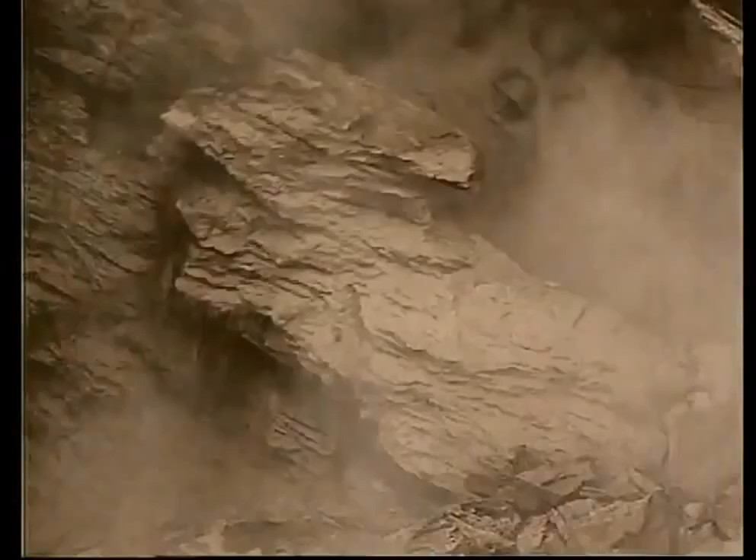To do this, miners will have to punch their way through some of the hardest rock on Earth. It will take the largest drilling machines on this planet, each more than 3 stories high and longer than 4 football fields, drilling 24 hours a day for 6 years to get the job done. The project is incredibly dangerous and outrageously expensive. The price tag, $7 billion.

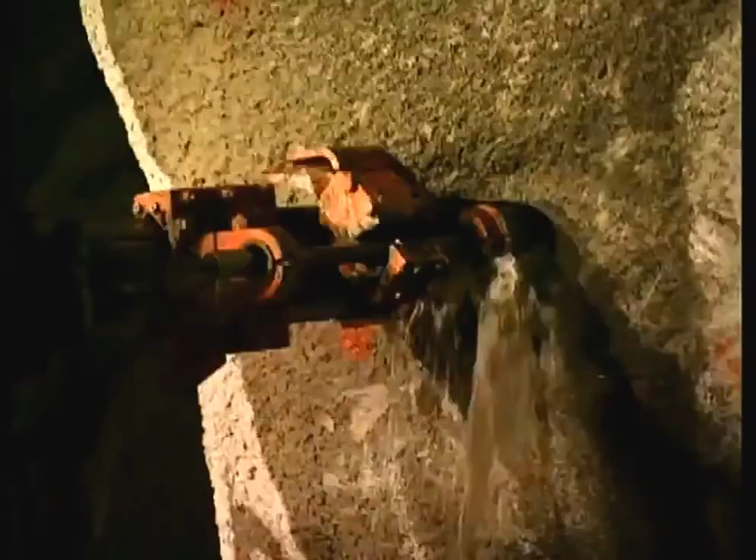Can it be done? Or will unforeseen problems bankrupt the project before it's finished? Will engineers be able to avoid the horrible fate of so many other tunnels? Fire, disaster, and death.

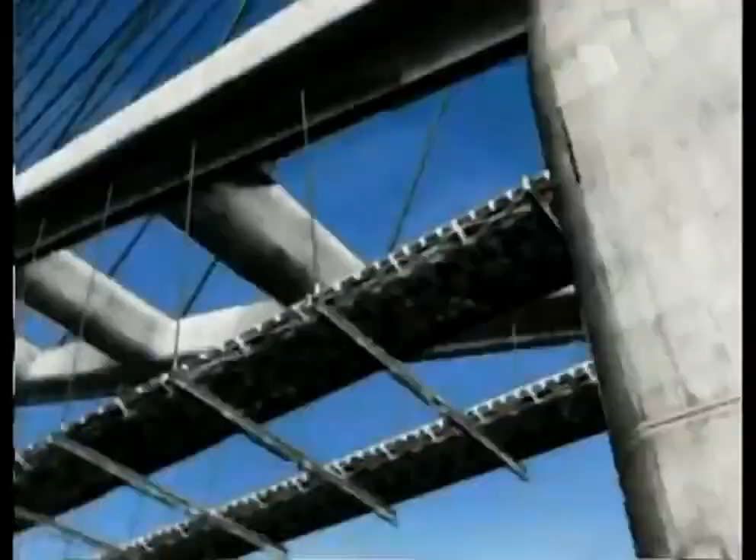To the outside world, Switzerland is a picture postcard. But the reality is not so pretty. Because of Switzerland's central location, each year 14 million trucks and cars coming from every corner of Europe pass through Switzerland on their way elsewhere. The sheer volume is fast turning this country into the biggest traffic jam in the world.

An obvious solution: put more freight and passengers onto trains to reduce the number of trucks and cars on the road. But it isn't that simple. The antiquated railway system is already jammed to capacity. In 1998, Swiss voters decided that something had to be done. So they voted to authorize a whopping $21 billion for a mammoth project. A high-speed rail network to be built under the Alps, connecting Switzerland to the major cities of Europe.

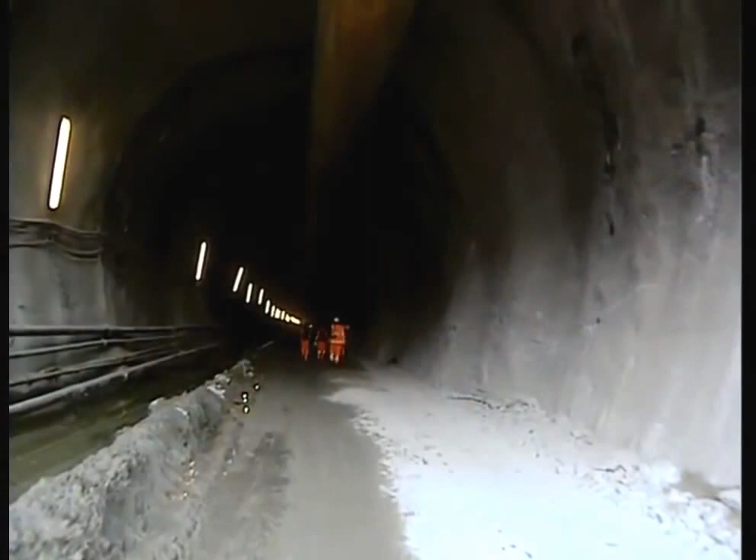The scale of the proposed project was staggering. It would require 2 separate tunnels, each one far longer than any mountain tunnel ever built. The shorter of the tunnels, named Lötschberg, would run for 21 miles under the mountains in southwest Switzerland. 50 miles to the east, an even longer tunnel would run 35 miles through the Alps. Since it would run directly under a mountain range named Gotthard, it would be called the Gotthard Tunnel.

3 times longer than any other mountain tunnel in the world, the Gotthard Tunnel alone will cost $7 billion. Enough to have built the Golden Gate Bridge 17 times. The tunnel's path will be straight and flat, right through the base of the mountain range. This route will let freight trains race through the mountain at 100 miles per hour, more than double their current speed. And passenger trains will go even faster, up to 155 miles per hour.

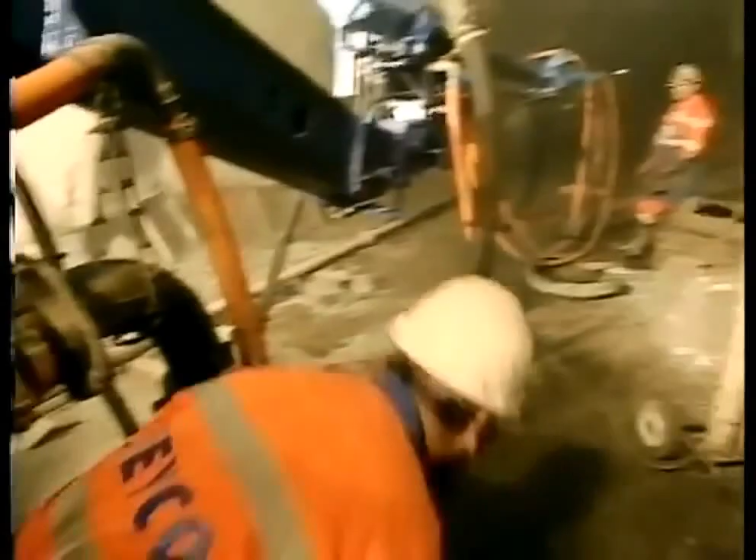Swiss voters were sold on the benefits of the proposed project. But they were also worried. They insisted that designers come up with plans to minimize the project's potentially devastating environmental impact. So the contract approved by the voters put enormous pressure on the engineers and the contractors. First, there was the guarantee. The engineers would need to certify that the tunnel would last at least 100 years. That meant that literally every material used in the tunnel would need to be subjected to the most rigorous testing in history. But that wasn't all.

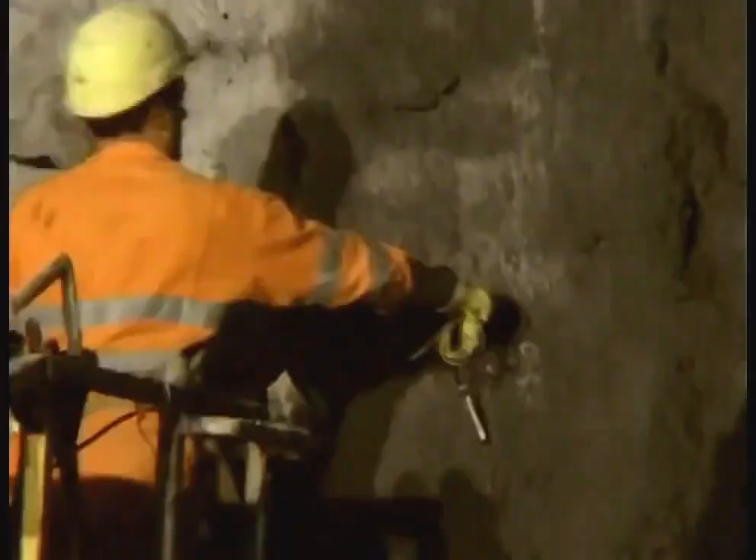The contract also called for the tunnel to be built fast. And if the builders made mistakes that put the project behind schedule or over budget, they would risk paying stiff financial penalties. We're not allowed to forget cost and time scheduling. Those are very risky things. And you just got to keep all of that in control. And everybody's just really aware the whole world is watching us, and we've got to get everything right.

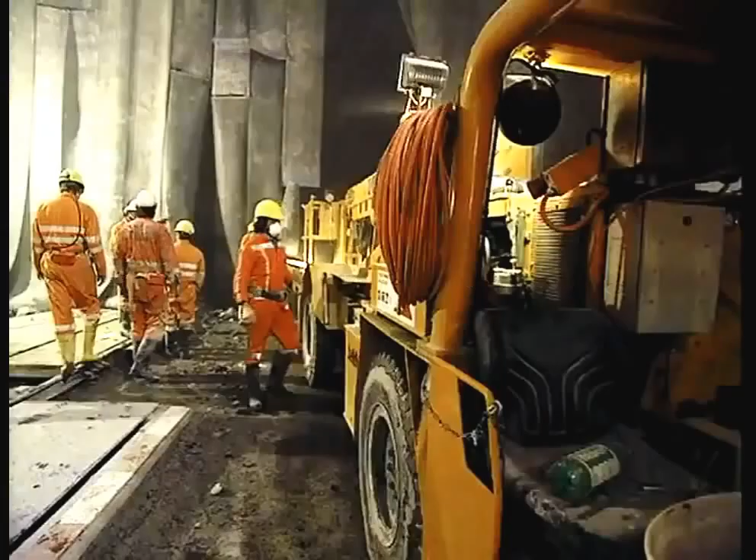Even without these added pressures, the Gotthard Tunnel project would still seem like an impossible task, just from the scale of the work itself. The miners will have to dig 24 million tons of rock out of the Alps. An amount that would fill over 16 football stadiums. Working conditions are extreme. Because the tunnel lies so deep underground, temperatures inside can reach 115 degrees. The miners work in near darkness and breathe thin, dusty air.

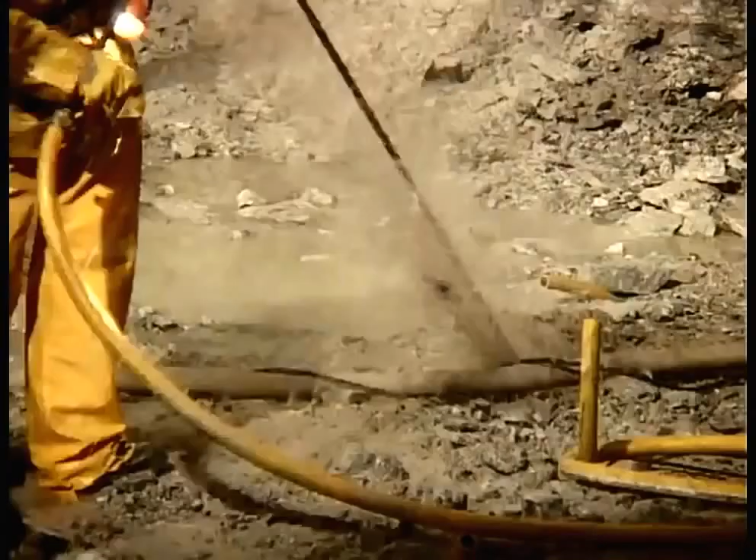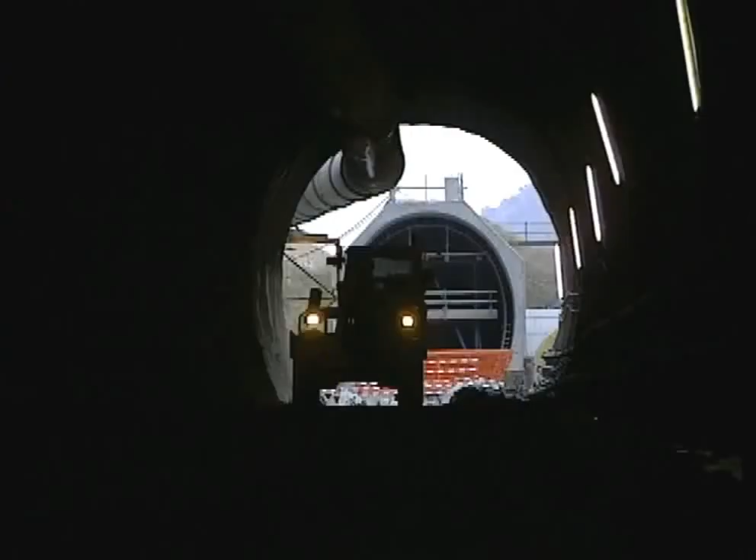Every day, they put their lives on the line. The biggest danger is lack of oxygen. In case of emergency, fire, explosion, the first thing that goes is the oxygen to breathe, because we're underground. We've got dumpers, we've got excavation machinery that move back and forwards. They're just moving around all the time.

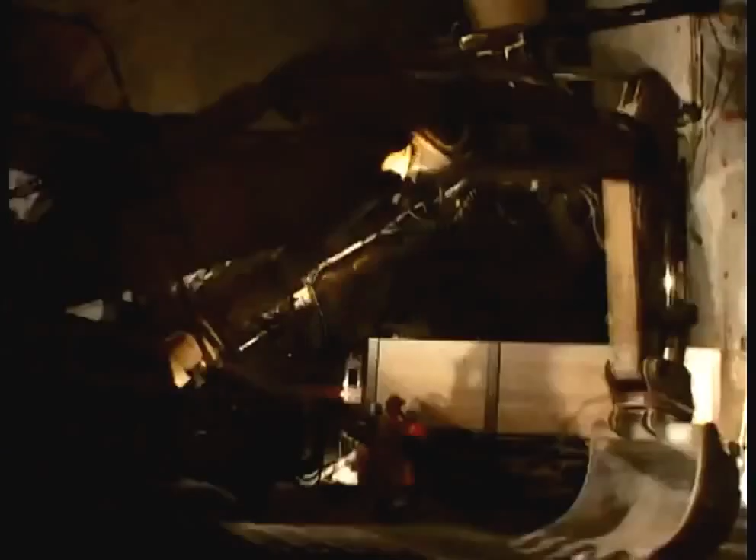It's dark, drivers don't see people walking around behind, and it could be if they reverse out that somebody gets hit by machinery.

And the dangers don't stop there. Tunneling, after all, is a battle between man and the earth itself.

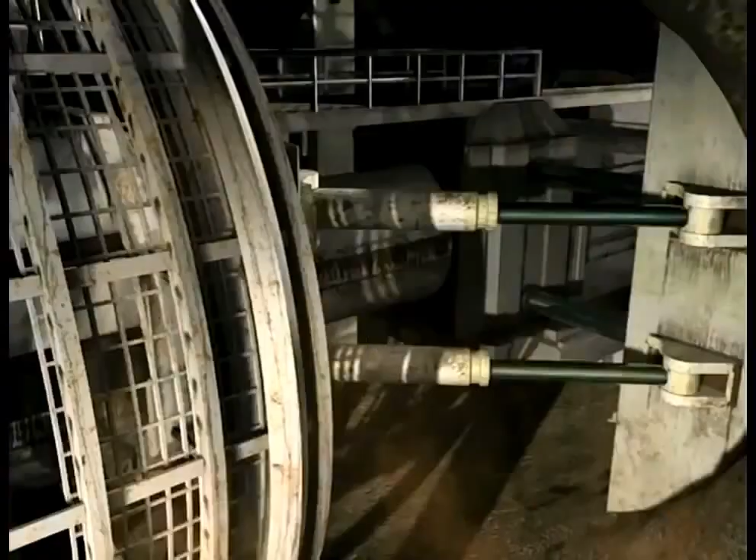Cave-ins are a constant threat. To minimize the risk, geologists take samples deep inside the mountain before any drilling begins, to find out just what kind of rock the drillers might encounter. A lot of sections we have rocks like this, real hard, gneiss, granites, where we go through by a tunneling borer machine. The tunnel boring machine, or TBM, designed for the Gotthard Tunnel, can chew away at hard rock.

But if the miners encounter soft or unstable areas, they have to use a different method. The rock must be drilled and then blasted out. And in areas where there are high-pressure water zones and crumbly rock, none of these methods can be used, and the danger increases exponentially.

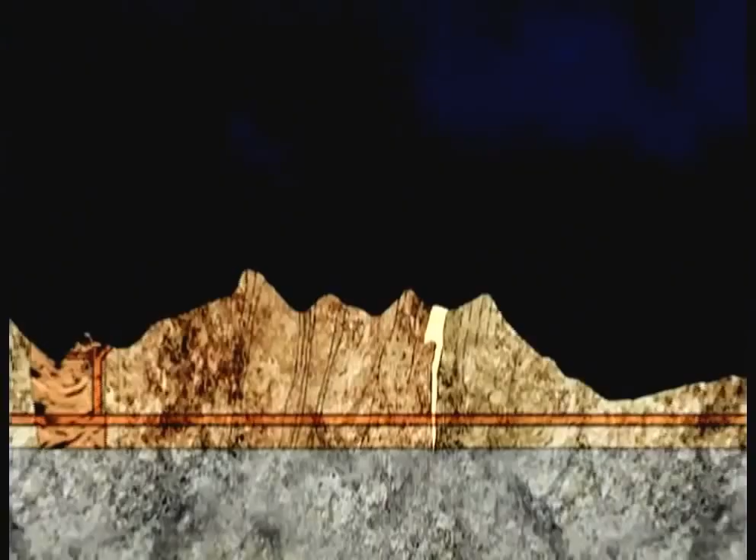In 1996, during the initial surveys, geologists discovered such an area, sitting near the path of the proposed tunnel. The geological team taking core samples got hit by a sudden, powerful explosion of sand and water. It's like you're in a submarine, 3,000 feet under sea level, and you drill outside into the sea. You hope that the water doesn't come into the submarine. So it's really life dangerous.

Fortunately, no one was killed in the accident. But the incident threatened to stop the project in its tracks. The engineers estimated that stabilizing the area would cost an extra $600 million. That money simply wasn't in the budget.

It took another half year of drilling deeper down before the geologists found a route that avoided the danger zone. And then we found a totally different rock. We found a marble. So this is not a difficult rock, so we can go through by TBM.

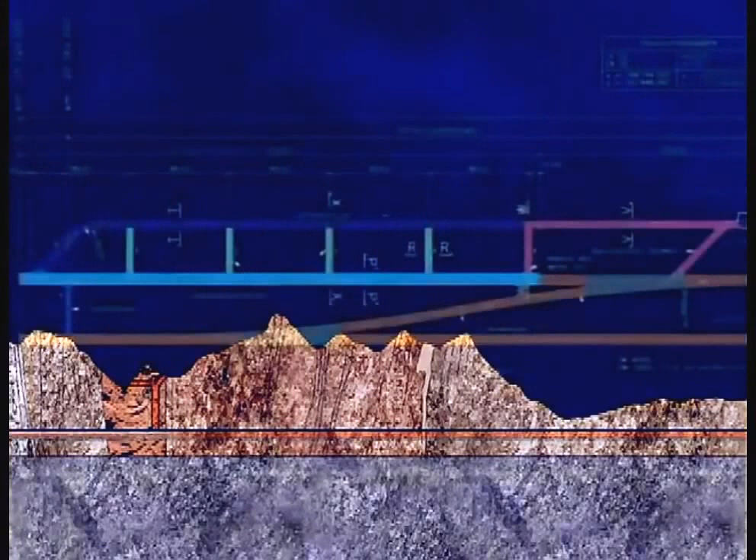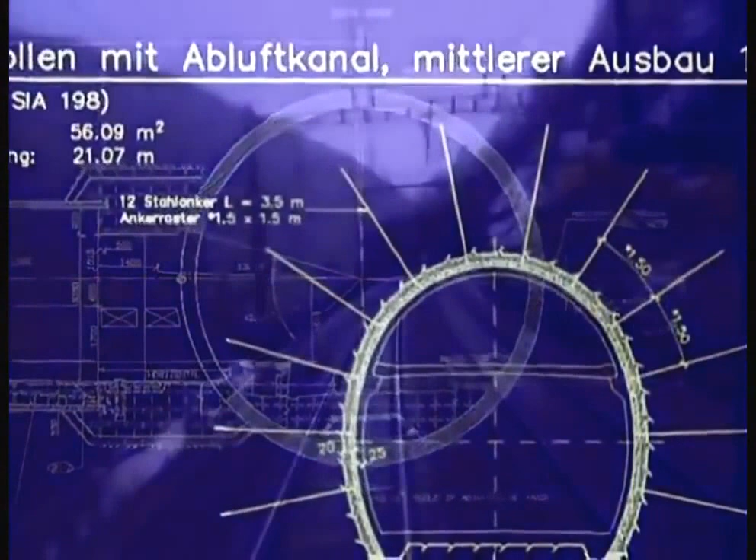Now that a safe path through the mountain had been determined, the design team could move on to their next big decision. What would the tunnels themselves look like? A single large tunnel with 2 sets of tracks inside would be the cheapest solution. But this design had a fatal flaw. If a train derailed inside the tunnel, it could hit an oncoming train or block the tunnel in both directions.

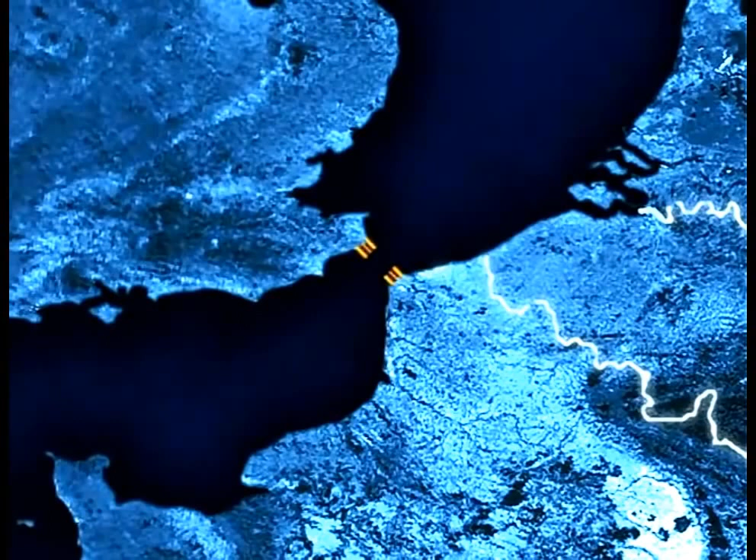A safer alternative would be the 3-tube system, like the one used in the Channel between France and England. The Channel has 2 single tunnels, one for each direction, and a smaller central tunnel for emergencies.

That third tunnel proved a lifesaver on November 18, 1996. That evening, a train carrying several trucks entered the tunnel on the French side. The conductor was unaware that one of the trucks had somehow caught on fire. At the time, there were 6 trains in the tunnel, including 2 passenger trains. 12 miles inside, the conductor brought the burning train to a dead stop. He tried to get the passengers out, but the smoke was so thick they could barely see the exits.

Eventually, they were able to make their way to the safety of the central emergency tunnel. They were very lucky. The fire was so intense in the tunnel they had left, it melted part of the concrete lining. 2 people suffered serious smoke inhalation. But thanks to that central emergency tunnel, nobody died.

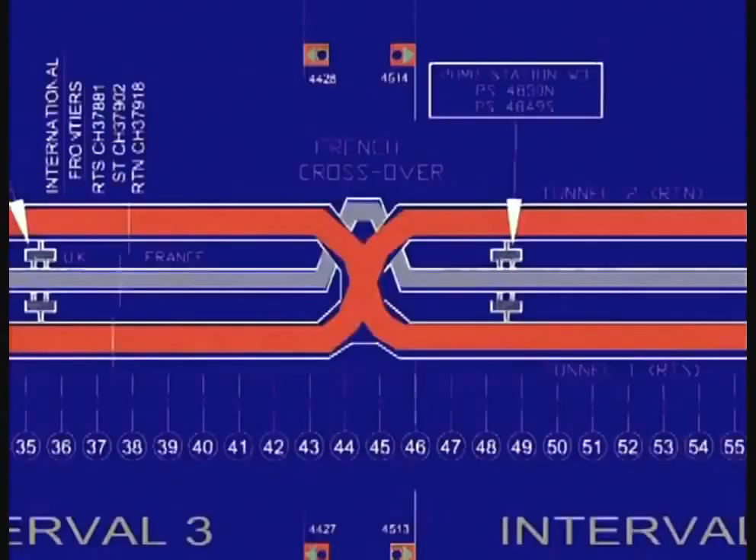The Swiss engineers carefully considered the pros and cons of each design. The single-tube system was clearly too dangerous. But the 3-tube system was far too expensive. So they came up with something else: a double-tube design. Separate tunnels going north and south that would reduce the risk of a head-on collision.

To enhance safety, they added passageways every 1,000 feet. These would allow emergency crews to move between both tubes. 2 crossover points along the track would allow trains to switch from one tunnel to the other in an emergency. The designers added another crucial feature: a series of small passageways connected to an escape route that crosses over to the other side. Each tube would have 2 of these emergency stations.

If a fire were ever detected, the computers in the command center would guide trains directly to the closest emergency station. Passengers would then evacuate the train and make their way to safety. A pair of massive ventilators at the portals would bring in fresh air and push out the smoke.

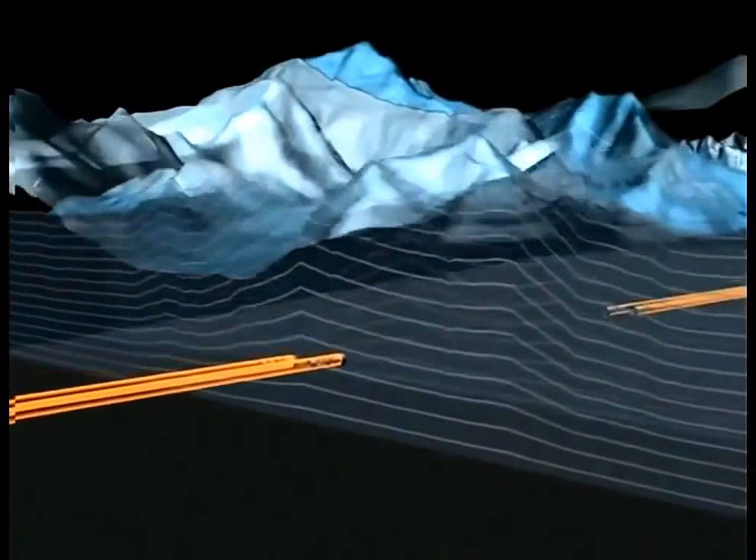Now the engineers had a workable design. Next, they needed to plot the tunnel's precise path. The plan called for massive tunnel boring machines to burrow in from the north and south. The trick is how to make sure they meet in the middle. If they miss by just 6 inches, tunnel workers will need to redig hundreds of feet of tunnel to get back on track.

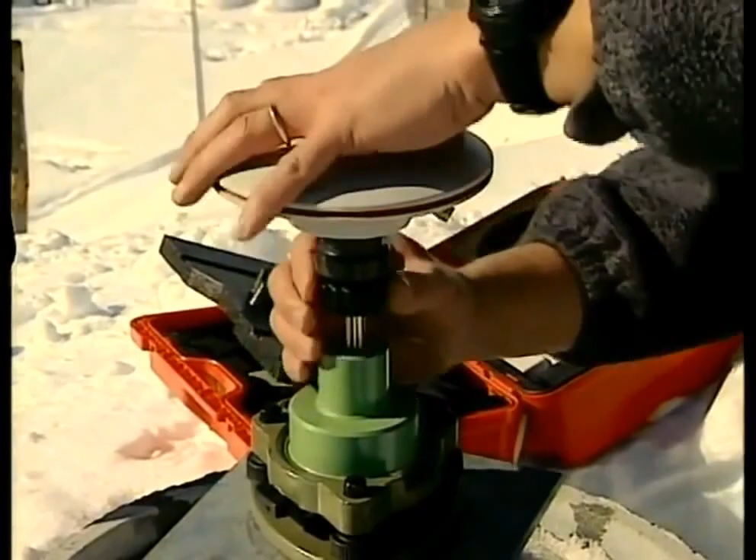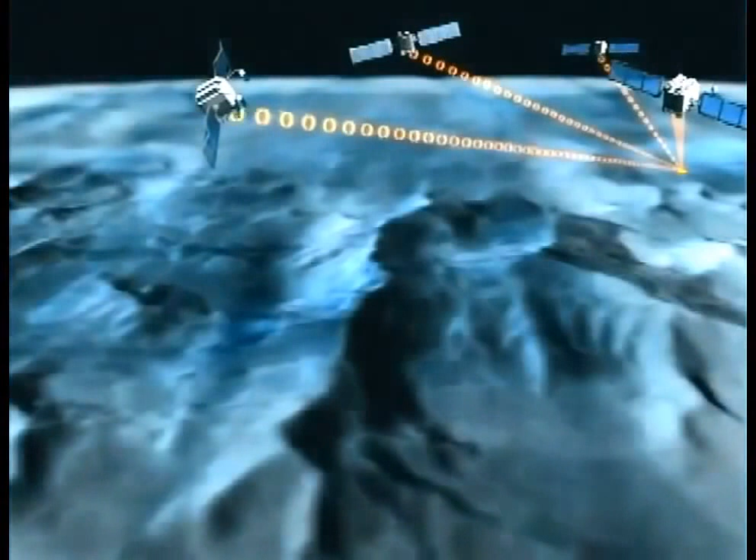So to make sure they had the most accurate mapping information, the engineers turned to the Global Positioning System, GPS. GPS receivers were placed at the north and south tunnel entrances, as well as 3 intermediate points along the proposed path of the tunnel. Next, 4 GPS satellites in geosynchronous orbit above the Earth beamed signals to the receivers, which gave them their precise coordinates: latitude, longitude, and altitude. Once the engineers had these coordinates, all they needed to do was connect the dots.

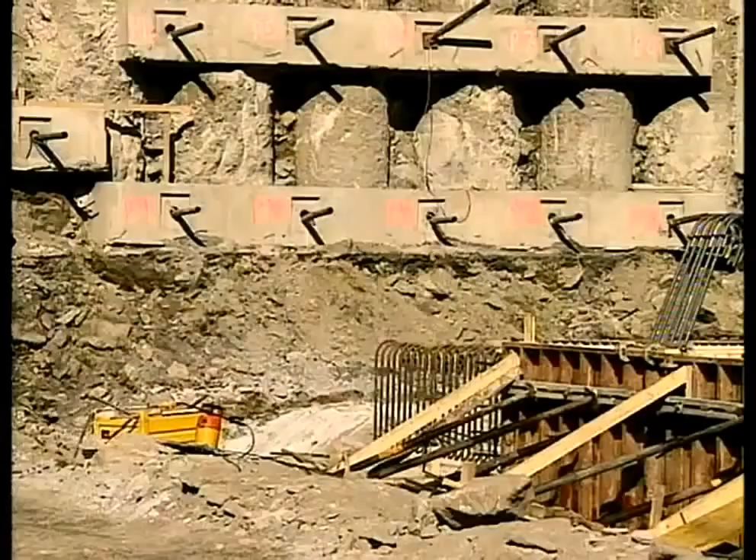The plans were complete. Now the real work could begin. Base camps were set up to launch the attack on the mountain. Because the job is so enormous, the engineers plan to enter the mountain from 5 distinct starting points.

It's a new system, a new way to excavate such a long tunnel. It would have taken us about 20 years to meet up because it's so long. With these measures of attacking with 3 intermediate attacks, we've speeded up the whole excavation phase by about 6 to 10 years.

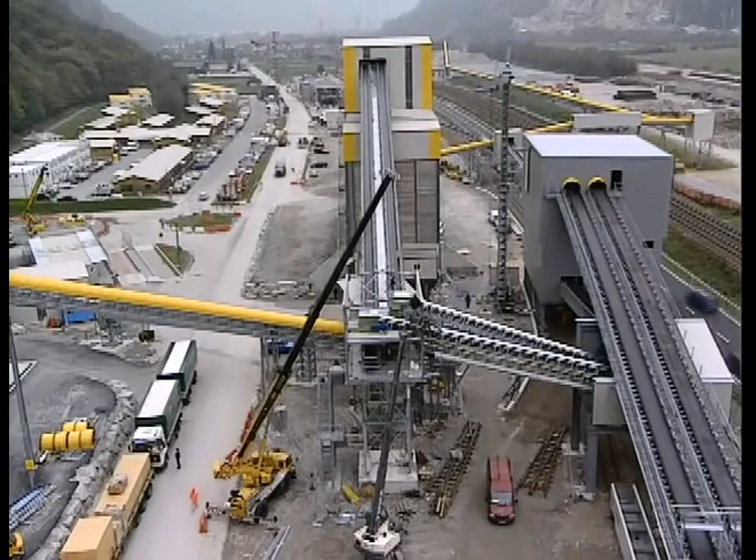Each starting point would have its own base camp, complete with concrete factory, water treatment center, living quarters for workers, cafeteria, even a mass transit system. The base camps would play a crucial role in keeping environmental damage to a minimum.

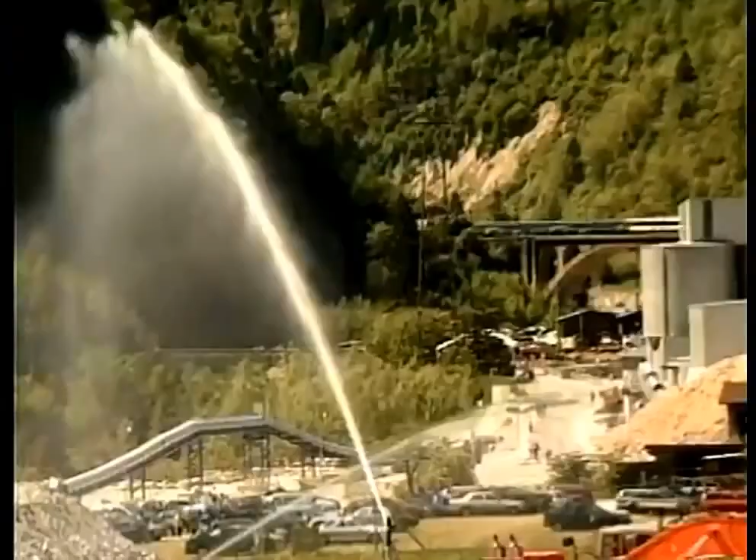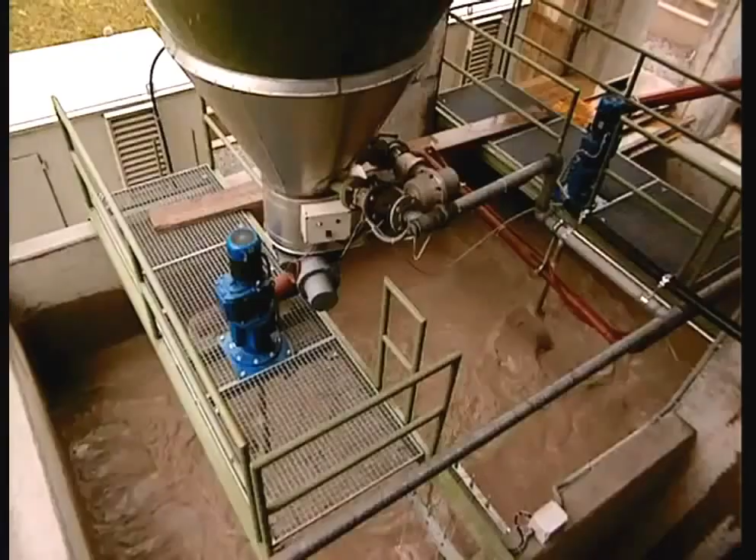A major concern was water. Drilling would contaminate huge quantities of pure mountain water that had been locked inside the mountain for millions of years. Water treatment plants at each base camp would filter out contaminants and then channel the water to nearby rivers.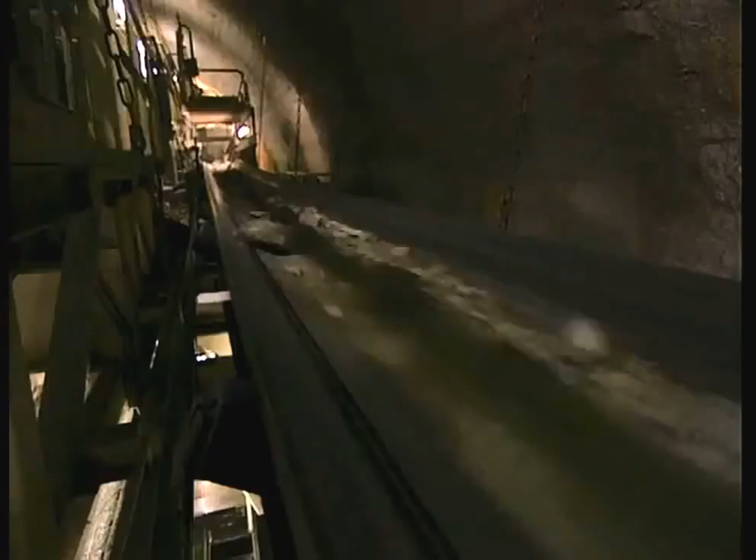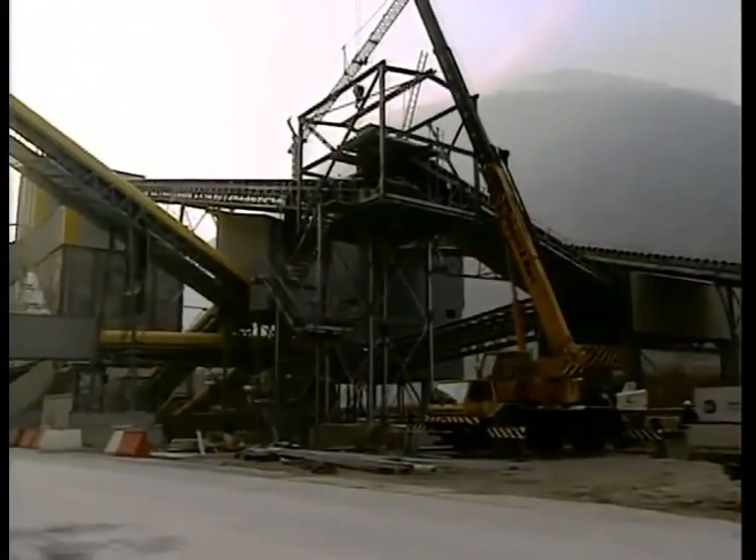But an even greater concern: rock debris. What could be done with the 24 million tons of rock the miners would carve out of the mountain? They came up with an ingenious plan: recycle it back into the project.

Concrete factories at each site would transform the rock to produce the 7.5 million tons of concrete needed to line the tunnel walls. That's enough concrete to pave an 8-lane highway 300 miles long.

Once the facilities were in place, project managers could start bringing in manpower. 1,800 workers were brought in from all over the world, among them the world's best technicians, explosive experts, and heavy machine operators. With the army in place, the full-scale attack on the mountain could begin.

Their first task: build access tunnels into the rock. These tunnels are needed to get the workers and equipment to the actual work site deep inside the mountain. The workers would enter the rock in trains, buses, even an elevator.

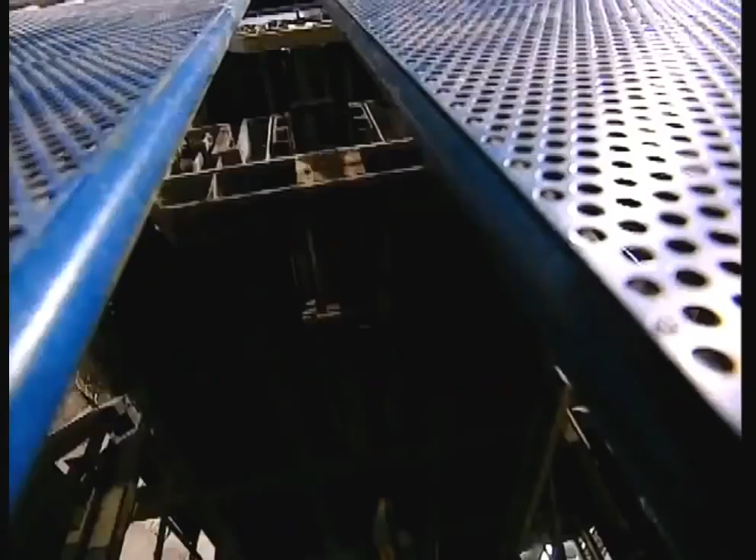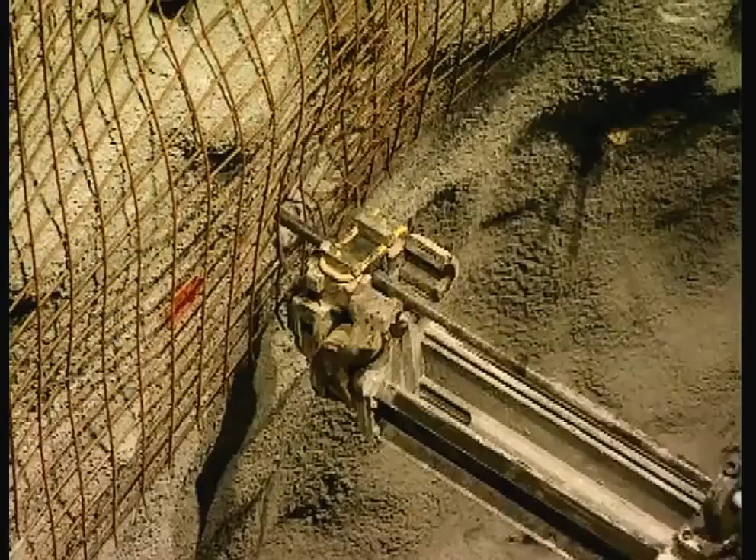The schedule required work to go on around the clock, 7 days a week, for 12 years. Drilling, digging, blasting, just to make the deadline.

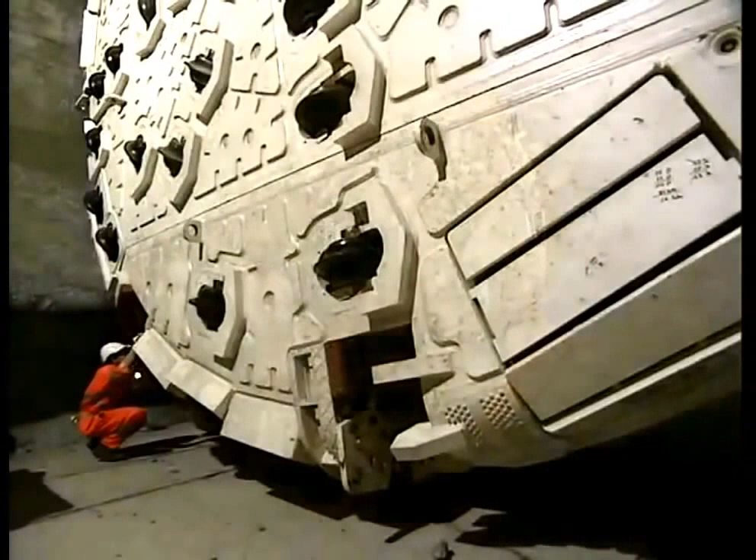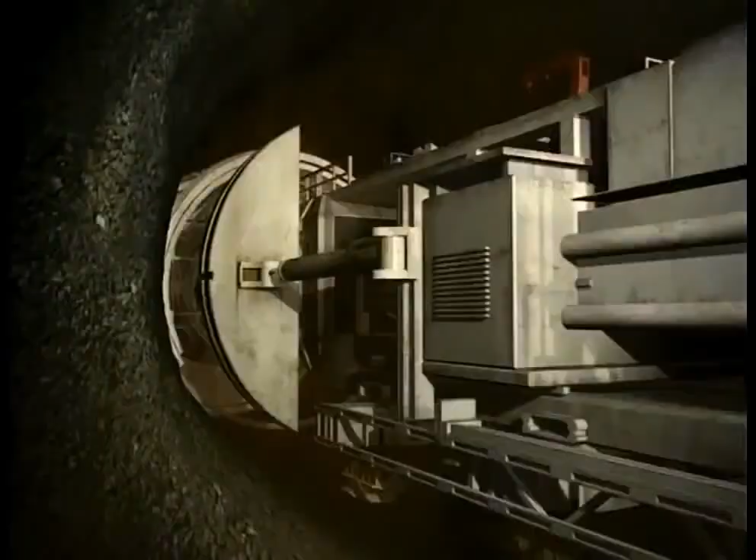But even at that pace, the project would be completely impossible without this. This is one of the biggest tunnel boring machines in the world. It's a drill with a drill bit 30 feet in diameter, designed to bore a tunnel through some of the hardest rock in the world. How big is it? 3 stories high, 4 football fields long. At full throttle, it can advance through 130 feet of solid rock in a day.

But even this gargantuan machine had never been tested under these conditions. Could it withstand 6 years of constant grinding? To improve the odds, the engineers had to arm the machine with the best possible weaponry, custom made for the job.

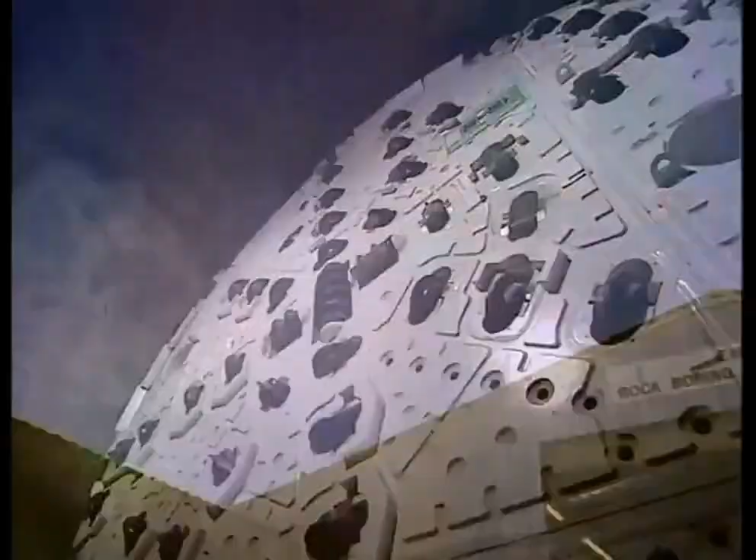The best custom drill bits for tunnel machines are designed here at the Colorado School of Mines. Looks like you are getting some overbreak over here. Researchers test individual cutters, the steel alloy rollers that actually grind the rock face.

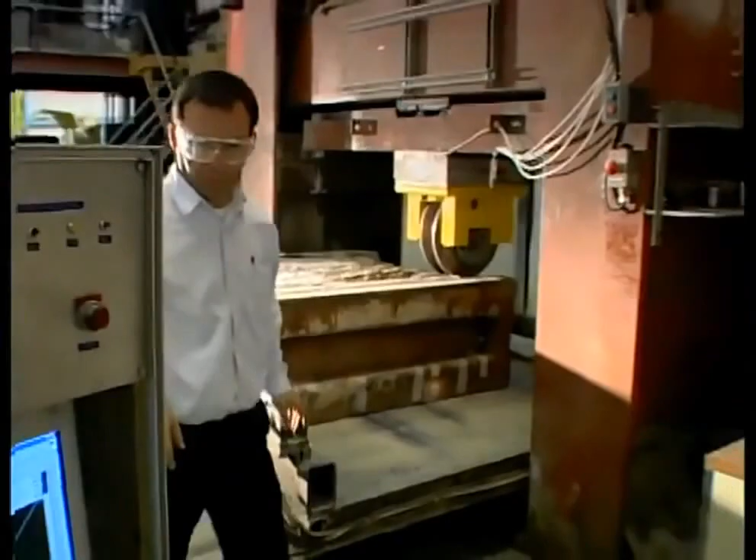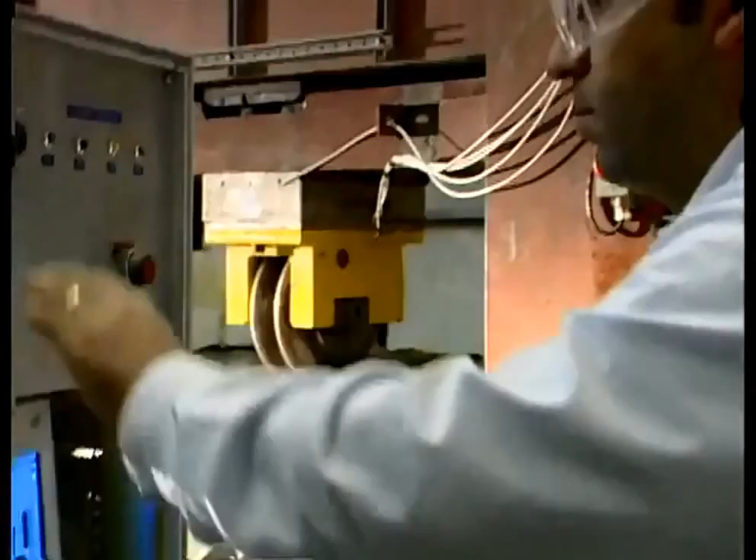To guarantee each cutter is best suited for its job, a rock sample from the tunnel site is placed on this machine. A cutter rolls over the rock again and again, and the machine measures the force needed to cut through the rock.

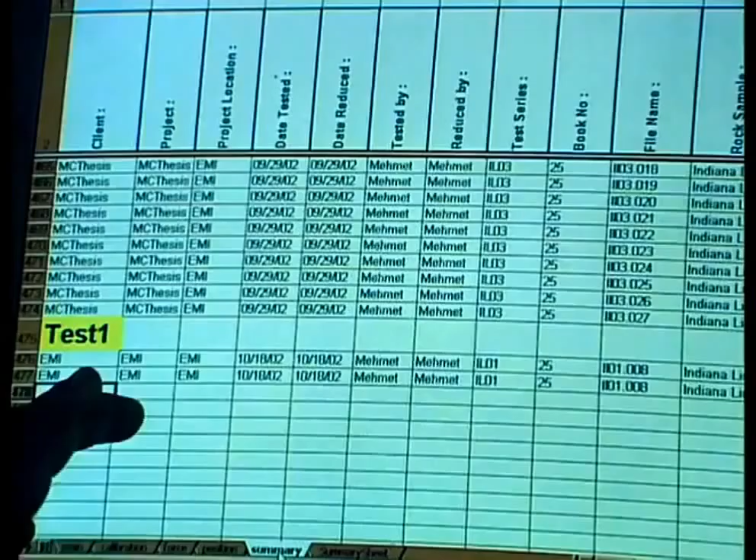The data we get from these tests allows us to design cutter heads that best match the tunnel boring machine to the rock being bored through, making the machine as productive and fast as possible. The testing is critical. If the cutters aren't made right, they could wear prematurely and slow the project down.

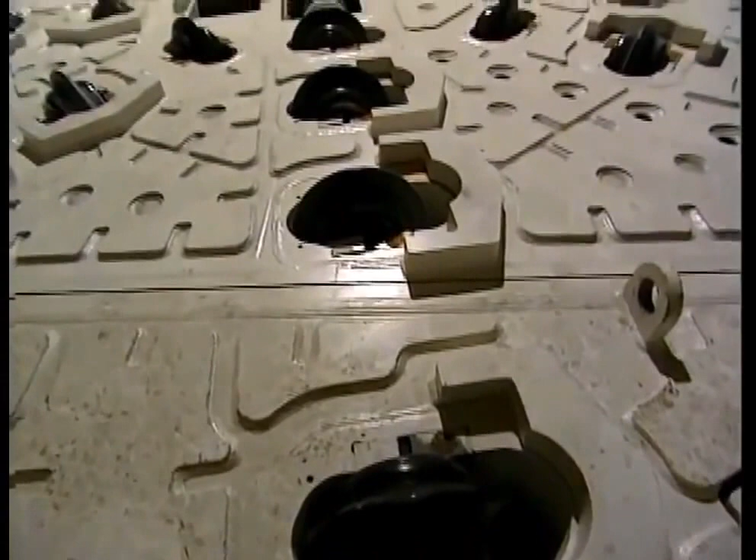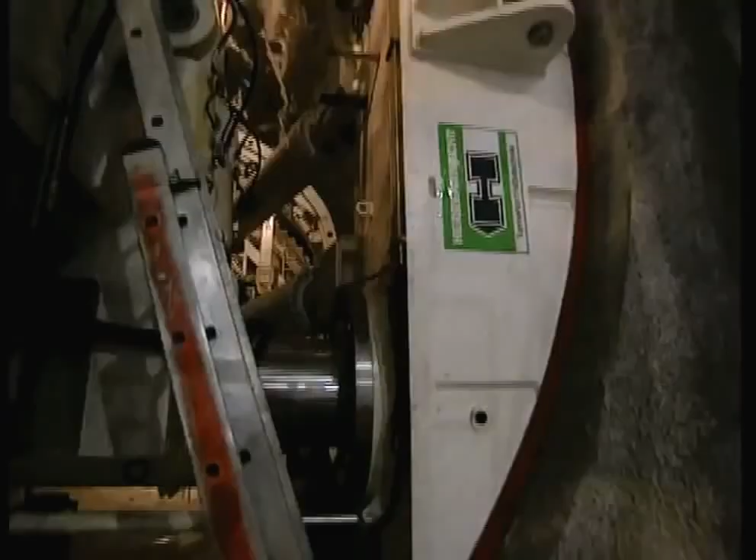58 of these cutters, each 17 inches in diameter, are mounted to the front of the boring machine's cutter head. The custom-designed cutter head was made in Germany and shipped to the tunnel site in Switzerland. It then took 3 more months for technicians to attach the cutter head to the machine. Meanwhile, the clock kept ticking.

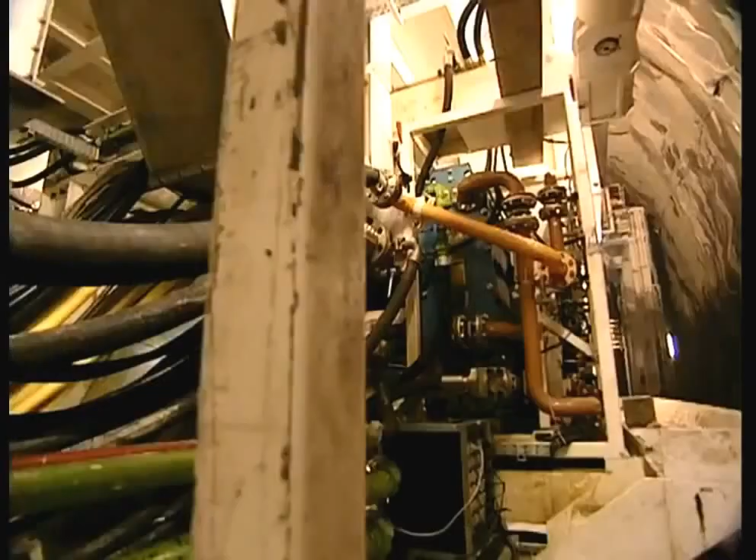In November 2002, the cutters finally had a chance to test their chops. It was a critical moment. Engineers, miners, and politicians gathered in the depths of the Alps to see if the giant would really work. They waited.

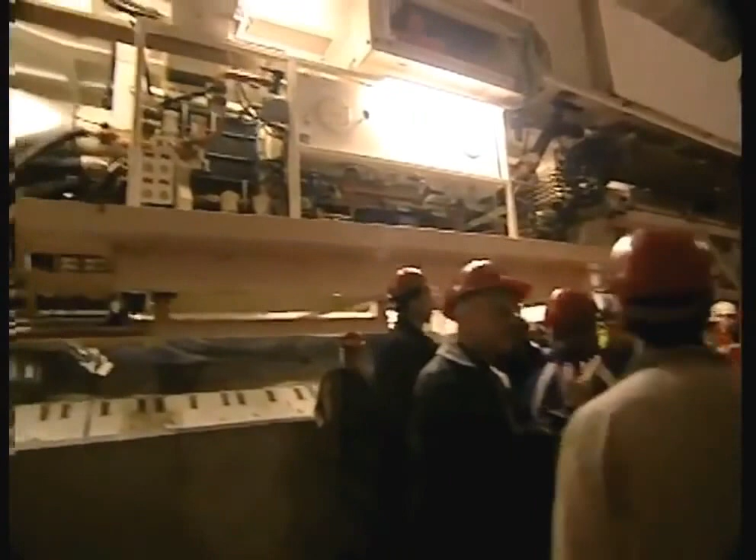Suddenly, the beast came alive, its 3,500 kilowatt engine cranking out 4,700 horsepower. The massive cutter head turned, pulverizing the granite into tiny bits. Everyone breathed a gigantic sigh of relief.

Of course, the cutter head doesn't do the job alone. The Gotthard's tunnel boring machine is a complex marvel made up of 90,000 parts. Aimed precisely in the direction of the tunnel to be, a pair of gripper pads is pressed against the rock, locking the boring machine in place.

The powerful hydraulic arms attached to the gripper pads push the cutter head forward, driving it into the rock. The cutter head turns counterclockwise, crushing the rock into small chips with its 58 cutters. Each cutter can exert 26 tons of force - that's like 58 cars simultaneously hitting a rock wall at 26 miles per hour.

As the cutter head grinds, the small chips fall into a set of rotating buckets. The buckets deposit the chips onto a conveyor belt, which shuttles them out of the tunnel and onto the concrete processing plant.

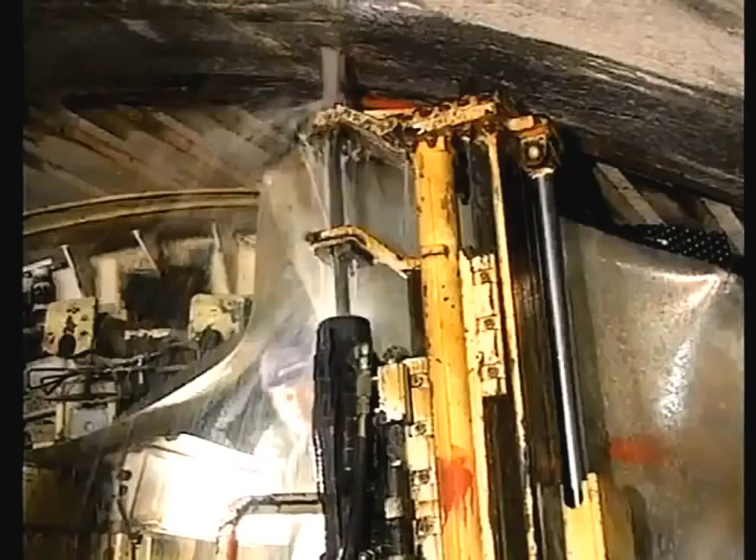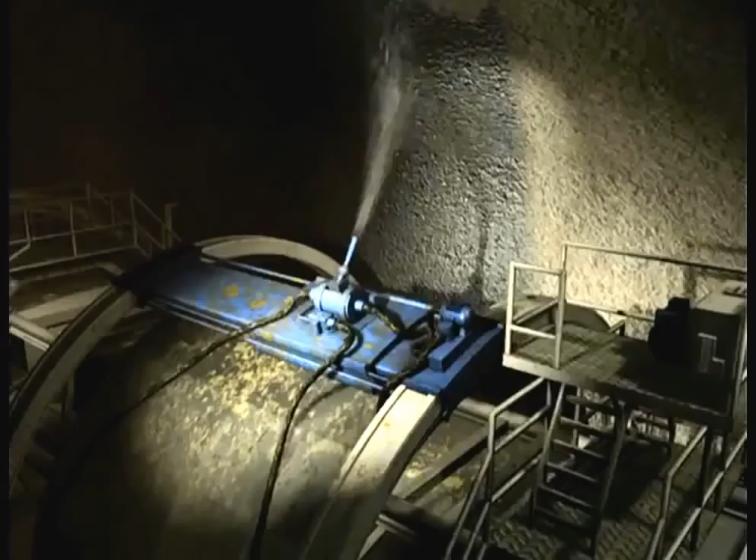65 yards behind the cutter head, a robotic arm sprays every square foot of new wall with a liquefied concrete called shotcrete. In seconds, the shotcrete dries, hardens, and binds to the tunnel walls, providing a tough inner skin as added insurance against cave-ins. After every 7-foot advance, workers must stop to reposition the grippers, and the process starts all over again.

The project is so massive and the schedule so tight, the job requires not one, but 6 of these $21 million tunnel boring machines.

One pair bores north from the south entrance, while a second pair grinds south from a midway point. Then a third pair of machines will start at the north entrance and drill south toward the midway point. If all goes as planned, the big machines will finish their part of the job in June 2009.

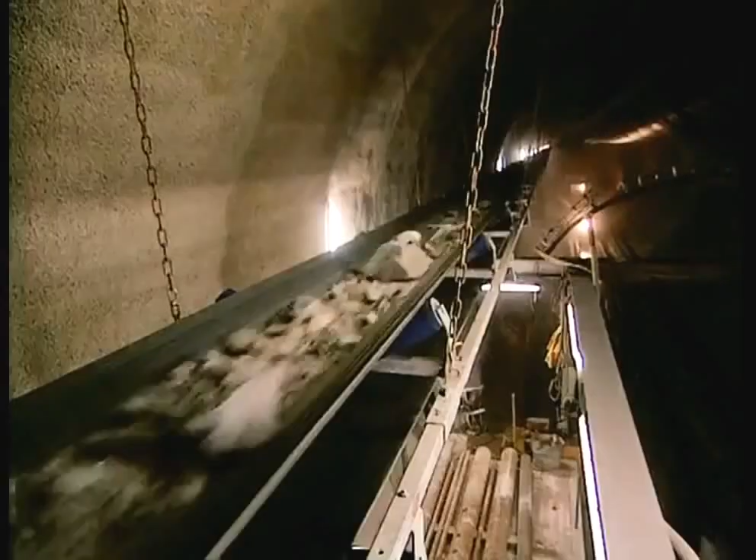But there are plenty of unknowns. And as powerful as the boring machines are, there are some places in the tunnel where they can't be used - that's because these machines can dig only straight and only through hard rock.

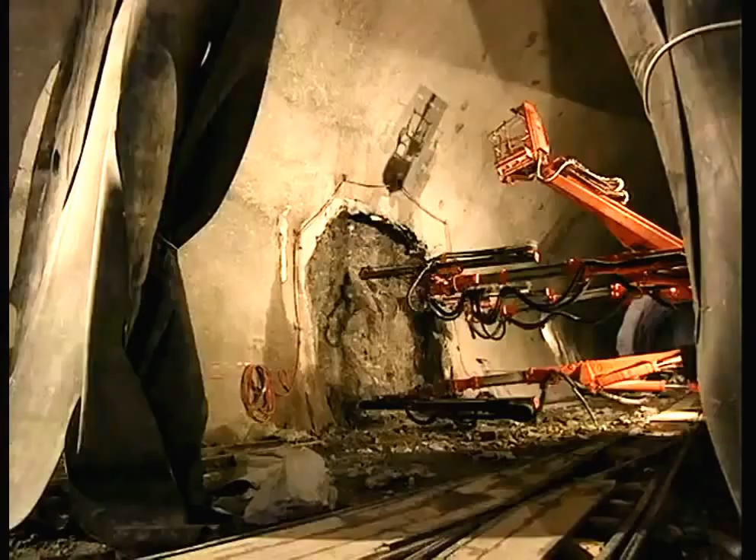But the Gotthard Tunnel will pass through a few areas where the rock turns soft or is broken and unstable. The risk of a cave-in is simply too high in these spots to use the machine. So they have to be dug out the old-fashioned way, by drilling and blasting.

This machine is called the Rocket Boomer. It's a huge rock drill, capable of choreographing an explosion so potent it can remove a perfect circle of rock up to 19 feet thick.

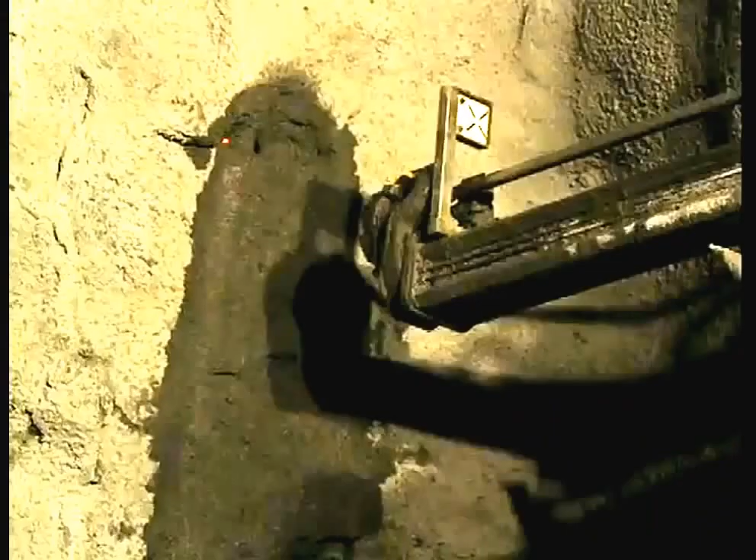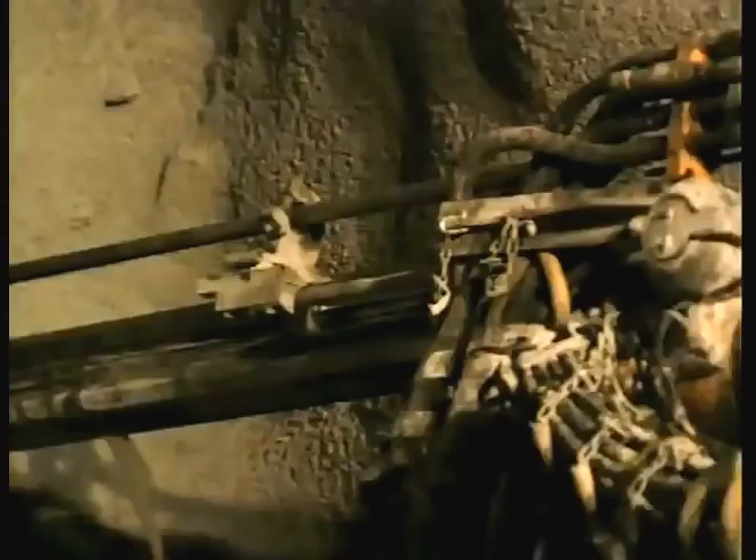First, a technician uses a laser beam to align the drill. Next, the Rocket Boomer's computer calculates the blast pattern that will deliver the most bang for the buck. Then the drilling begins - over 80 holes, up to 19 feet into the rock.

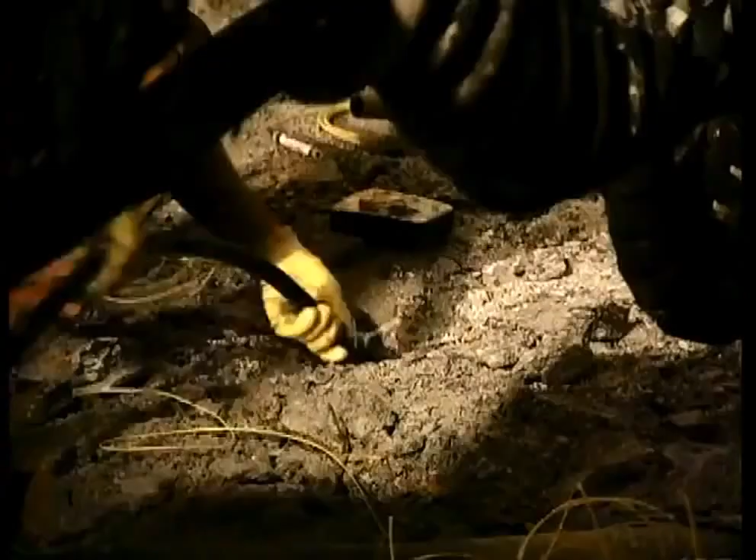Into these holes, a technician pumps precisely measured doses of 2 different chemicals. Each chemical on its own is completely harmless, but if the recipe is right, together they become a volatile cocktail.

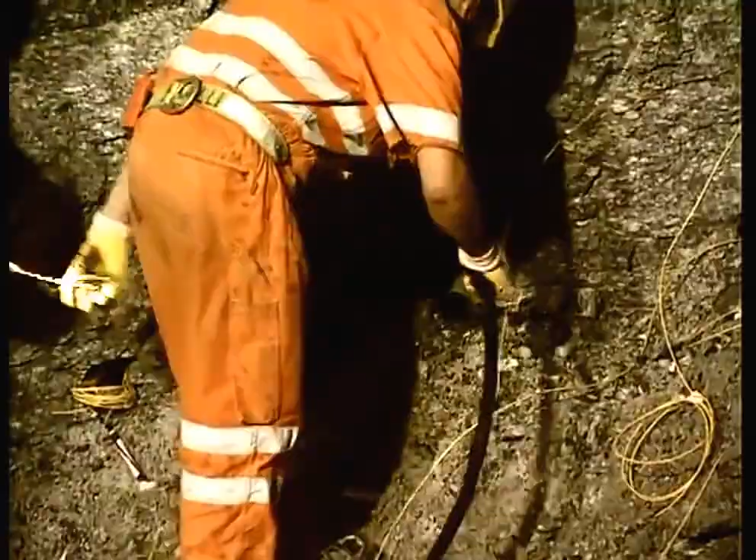To ignite the explosion, the technicians insert an electrical detonator into each hole. With all the leads linked together, a jolt of electricity sets off a massive blast.

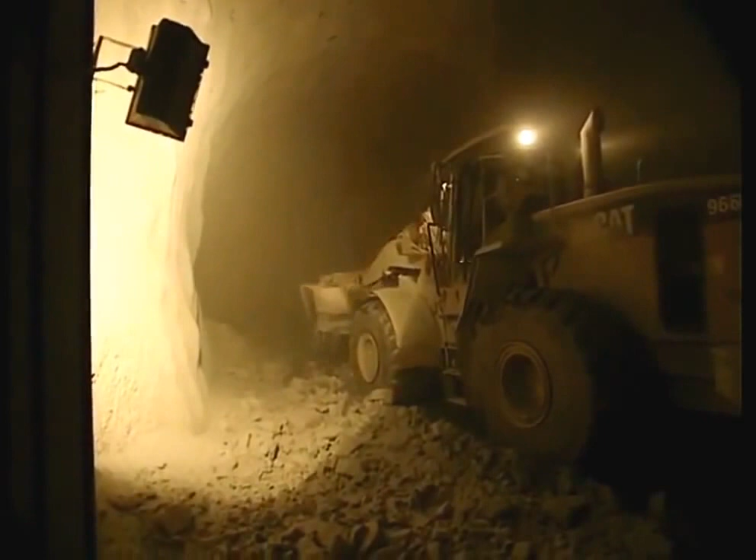Once the dust settles, the rubble is shoveled out. A single blast like this takes 8 hours to pull off. Their workday done, the blast team now makes way for the next shift, who will prepare the next blast.

Each day, on every front, the workers fight to advance into the rock as far as they can. The drilling team leads the way. They're backed up by a second unit, following closely on their heels, performing another crucial part of the job: building the concrete lining of the tunnel.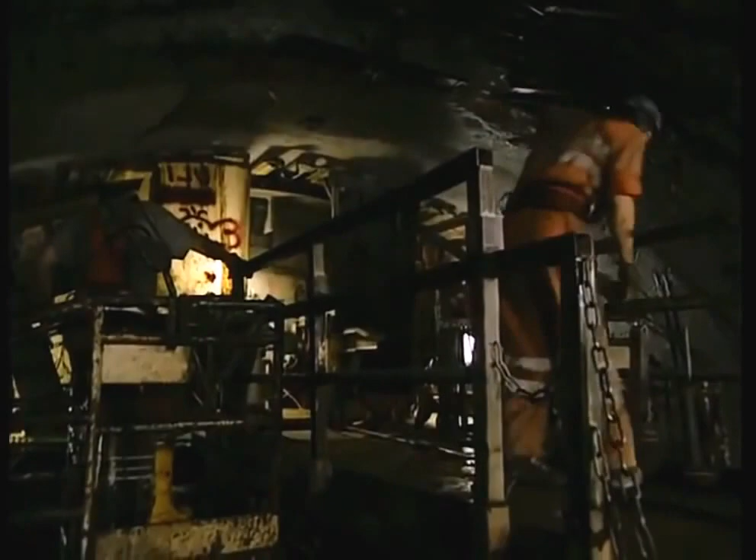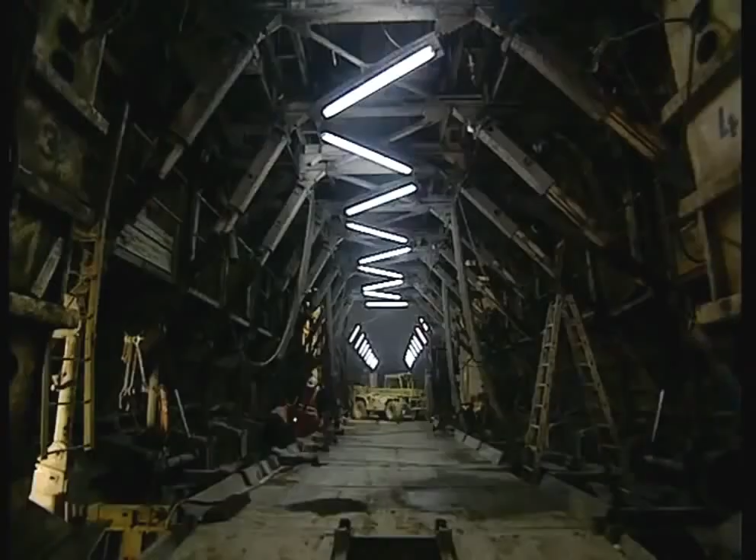50 miles west of the Gotthard, the drilling team working on the 21-mile-long Lötschberg Tunnel has almost completed the digging phase of the project. They've also already sprayed the tunnel walls with a layer of shotcrete, the liquefied concrete that stabilizes the rock as it dries. Now, the tunnel is almost ready for its final concrete lining. First, it must be carefully prepared.

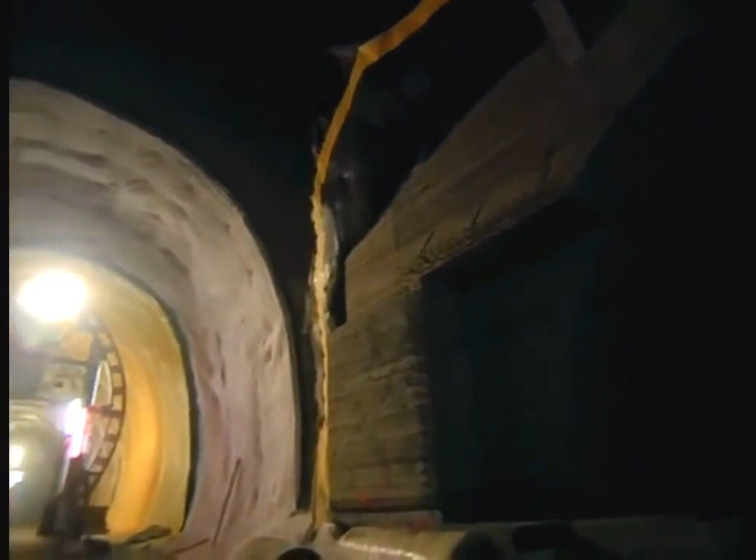At this stage, water is the enemy. Groundwater is always seeping through the rock and must be drained away. If not, water pressure can build up and literally push in the concrete lining of the tunnel. To prevent this, the team applies an ingenious system of layering to the shotcrete wall.

The first layer is a white plastic webbed mesh. The water trickles down the mesh into a drainage system at the bottom of the tunnel. A second layer of solid plastic sheeting seals off any remaining water behind it. This should make the inside of the tunnel waterproof.

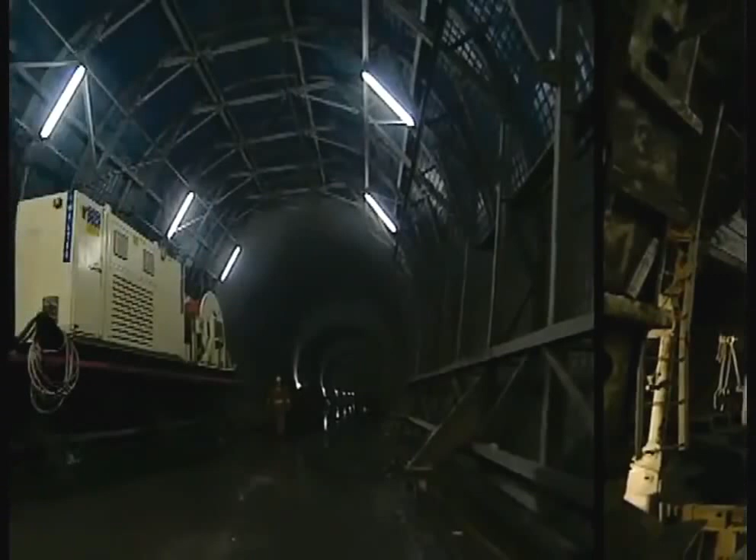Next, huge metal forms are put into place. And then, concrete is injected behind them. As the concrete dries, engineers keep water running over its surface so it won't crack. When the metal forms are removed, the smooth, final concrete lining is left behind.

Of course, the concrete used in these tunnels is no ordinary concrete. The designers have guaranteed that the tunnels will last at least a century. So everything that goes into the tunnel has been put through the most rigorous testing in the industry. And that's done here, at the most advanced tunnel testing facility in the world, the Hagerbach Test Tunnel, 40 miles northeast of the Gotthard.

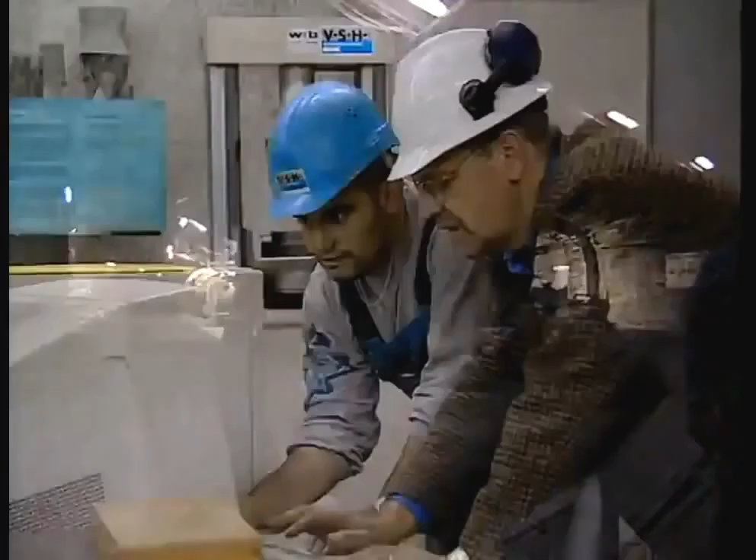The Hagerbach test site is a labyrinth of tunnels crisscrossing and stretching 2.5 miles into the mountain. Here, engineers must test and approve everything used inside the Swiss Alp Tunnel project. In this laboratory, engineers subject concrete blocks to extreme pressure. The concrete lining has to hold up under the mountain's weight as the rock settles.

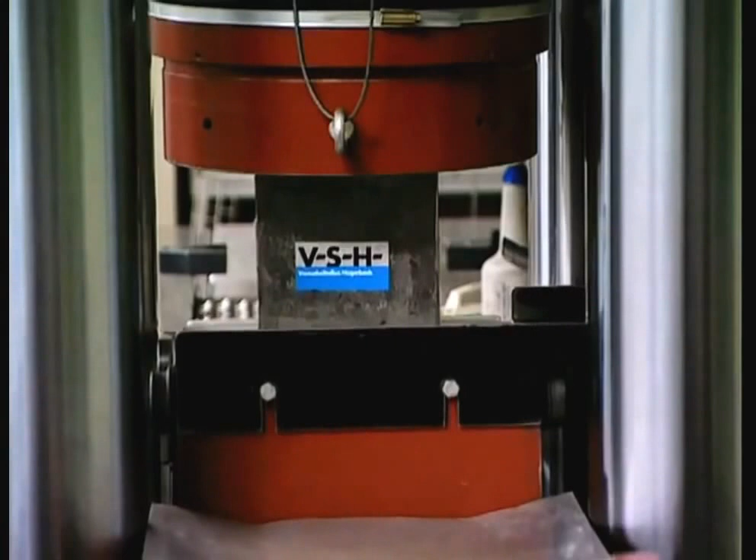When the deformation and the forces are too high in such a tunnel, then you have some cracks in the lining, or the worst case is that the lining can break down.

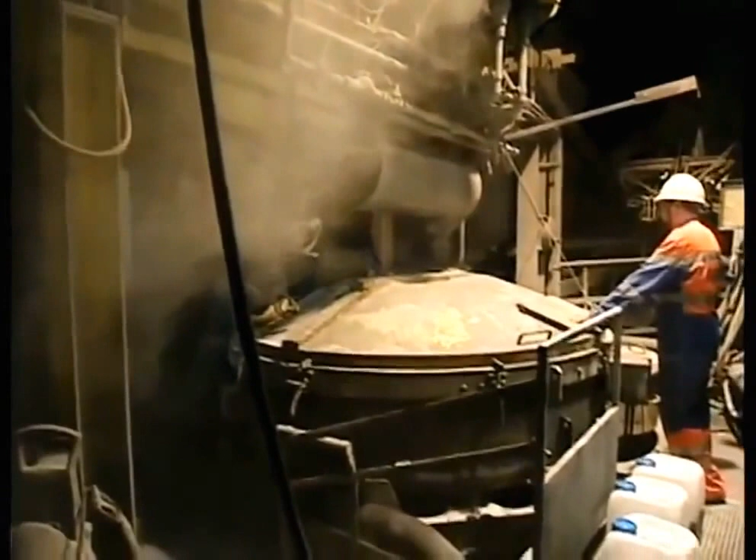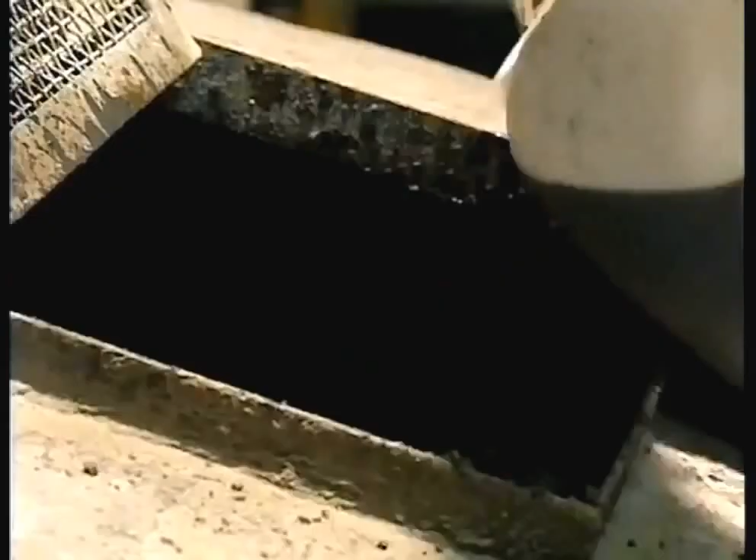Here, engineers are fine-tuning a shotcrete recipe. A mix of sand, gravel, water, and cement that is sprayed onto the tunnel's bare rock walls. The precise ratio of ingredients is crucial. Too little water, the shotcrete will be too thick to spray. Too much water, it will be too weak. Shotcrete also must be able to withstand extreme hot and cold temperatures.

In this area, engineers are testing explosives. Different types of rock need different formulas. Because the Gotthard Tunnel has extremely hard rock, they need an explosive with a lot of kick.

These tunnels are also used to test people, to prepare them for disaster. Fire is one of the biggest dangers in a tunnel. Using wooden crates and gasoline, the engineers simulate a common tunnel accident scenario: a truck on fire. In just a few minutes, the fire is a raging inferno. In a fire, a tunnel acts just like an oven.

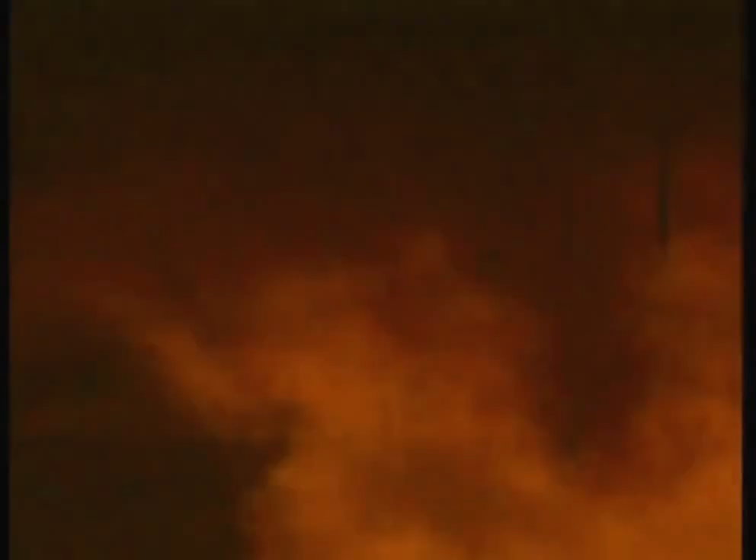Temperatures can exceed 2,000 degrees Fahrenheit, hot enough to vaporize human flesh, even concrete. So firefighters have to be trained to move fast, to knock down any blaze.

Tunnels are also dangerous because they're cut off from air and light. Emergency crews can find their access blocked. The longer a tunnel, the longer it could take to get out if disaster should strike. And that happens more frequently than most people realize.

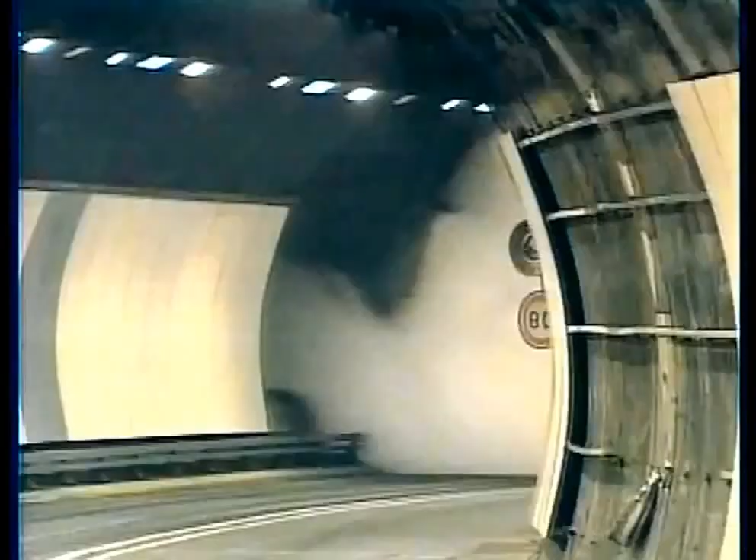March 24th, 1999 started out like any other day. At 10:45 a.m., cars and trucks were speeding into the Mont Blanc tunnel between France and Italy, unaware of what was about to engulf them. About 4 miles into the tunnel on the French side, a truck driver noticed smoke pouring from the back of his rig. He pulled over, but within seconds, his truck was completely consumed in flames.

Unfortunately, the ventilation system was no match for the smoke. It was so thick, it took emergency crews an entire day just to reach the blaze. The fire burned for days. When it was all over, 39 people were dead. Temperatures inside the tunnel had reached 2,300 degrees, melting sections of the concrete lining. The disaster forced a major redesign of the tunnel's emergency systems.

Learning from previous accidents or incidents is absolutely vital. It is one way that you understand how incidents occur, why they occur, how they develop, how people reacted to the incident in any one case, what worked well and what didn't work well. In this case, the lessons were learned the hard way. So engineers were determined to get things right the next time around.

First, they added 76 high-powered fans to blow out smoke and bring in fresh air. They set up fire stations inside the tunnel so crews can get to the fire quicker. Now, heat sensors at each entrance scan all trucks for overheated engines. 120 cameras linked to command control centers monitor traffic around the clock.

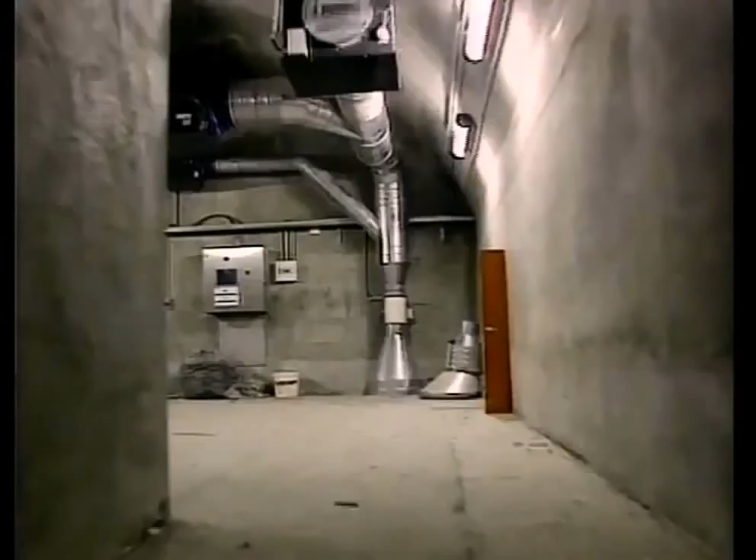The number of emergency shelters was doubled. There are now 37, placed every 1,000 feet, running the full length of the Mont Blanc tunnel. Every shelter has a direct phone line to the central control room. And the engineers added something new, a way out of the tunnel. Inside each shelter, a stairway leads to a passageway below the main tunnel. In a disaster, emergency crews would be waiting there to take the drivers out.

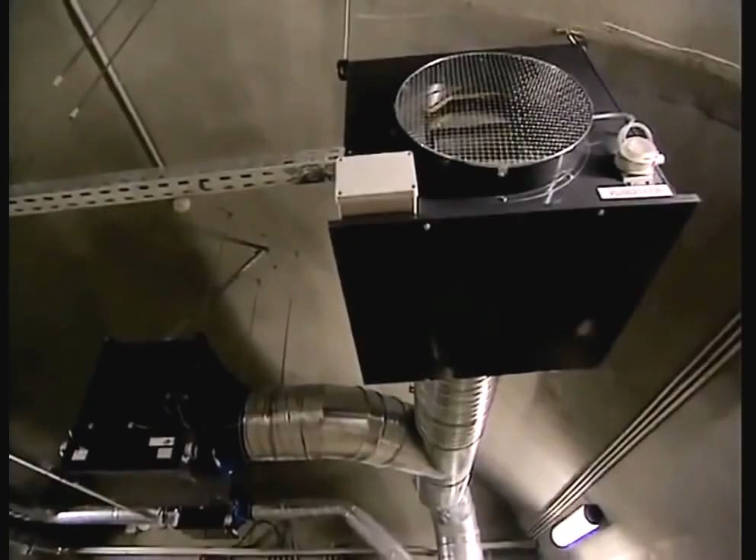The redesigned Mont Blanc tunnel is considered one of the safest in the world. But even with all the new features, there will always be a risk. No tunnel is 100% safe. Fires occur in tunnels simply because there is flammable material and sources of ignition. And you will never eliminate those completely.

The risk of a fire haunts the designers of the new Gotthard Tunnel. Some freight traveling through it will be lethal. Volatile fuels and chemicals that could catch on fire, or even worse, explode. The year is 2015. The new high-speed rail through the Gotthard Tunnel is a huge success. Just as the designers had predicted, the roads now run free of traffic jams.

But today, things could change. A small fire has just erupted on a freight train also carrying passengers. No one on board sees the fire. And the train is carrying a dangerous cargo of highly flammable fuel. 12 miles inside the tunnel, a passenger suddenly notices the smoke and alerts the conductor. The train's only hope: make it to an emergency station. The conductor knows that a massive explosion could happen any minute. If he can't evacuate his passengers, all of them will likely perish.